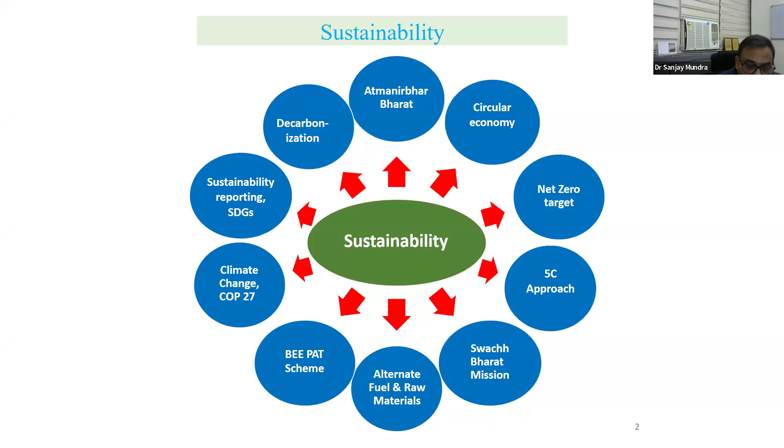Climate change as per COP27, now COP28, 29 - every year we do this climate change conference of party meetings through the PM or nation's representatives. Sustainability reporting, the SDG goals, decarbonization, and ultimately Atmanirbhar Bharat - we will discuss all these aspects.

First we have to understand what are the steps to sustainability. The actual meaning is: whatever locally available materials, available fuels, available resources - how can we convert these into sustainable use. If we talk about high strength or high performance concrete, the term is simple, but you have to understand how to procure and produce it. That is a challenge - how can we make concrete more durable, because our IS 456 is now going to be revised from prescriptive basis to performance basis.

Replacing Portland cement with supplementary cementing materials - fly ash, GGBS, silica fume, metakaolin, natural pozzolans, rice husk - we have already discussed a lot, and your institute too. These are all replaceable binders, and we are coming not only with single binders but quaternary binders, ternary binders as well. Using fillers like finely divided limestone and finely divided silica - researchers are doing tremendous work here, making more sustainable cement and concrete using these fillers.

Using waste materials as fuel, like refuse-derived fuels and plastic waste. Using recycled concrete - be it aggregate, concrete part, or fines - and industrial waste as aggregate. Using carbon capture utilization and storage is very important now, as every institute in the world is thinking about CCU and CCS technologies, which I will discuss in the worldwide roadmap. Using less water is required to make performant concrete for durability. By incorporating new generation chemical admixtures - PCE based admixtures from generation 1 to generation 5 - and improving structural design and building codes, all these are areas of focus for sustainability.

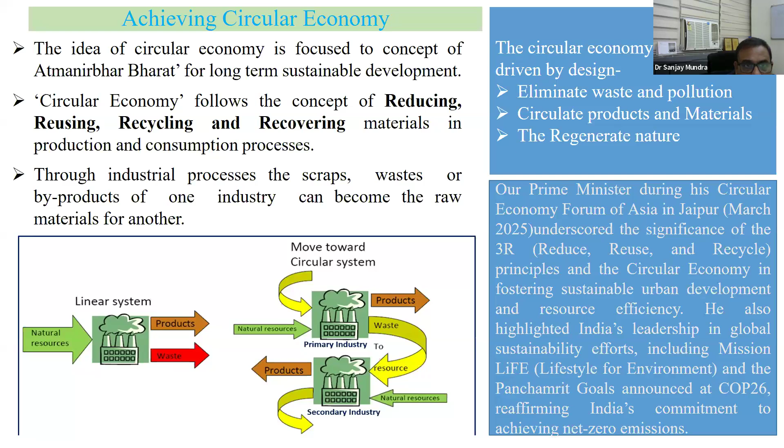Most developed countries have targeted around 2050 for net zero, but India is gradually targeting 2070, so that we can achieve the goal of net zero and minimize the global warming level, which is 1.5 degrees Celsius.

The status of CO2 emission from Indian cement industry: the overall installed capacity of cement in India is currently 690 million tons, precisely 693, and cement production for year 23-24 was 427 million tons. So there is a huge gap between the production and the consumption, and we have to bridge that gap.

Globally, cement sector's CO2 emission is around 7% of total anthropogenic emissions, while the CO2 emission factor was 1.12 in 1996. Now, with the use of novel binders and supplementary pozzolanic material, we have to reduce it to 0.617, through indirect emissions also.

Reduction of clinker factor, because all the GHG emission or CO2 emission comes from the clinker. So how can we reduce the clinker factor? That is the challenge. We are using novel binders apart from pozzolanic materials.

We have brought so many new novel cements in the form of LC3, Portland dolomitic cement, Portland limestone cement, and other low heat cements we are producing.

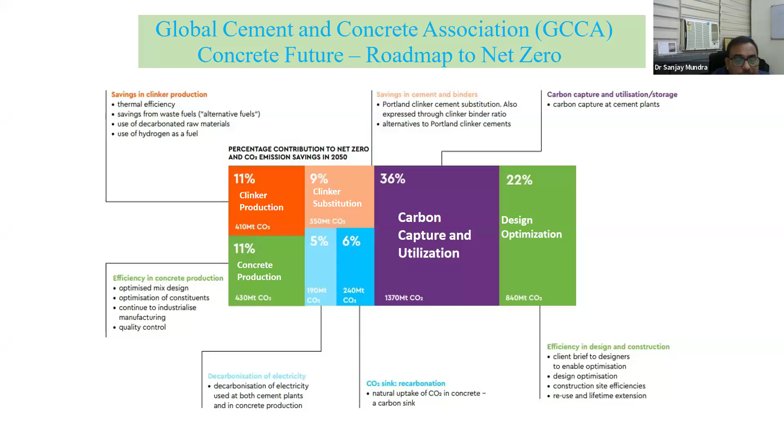And efficiency design construction, by briefing the designers to enable design optimization, construction site efficiency, reuse, and lifetime extension. So this is another roadmap of CEMBUREAU, which has the 5C approaches.

Then another Portland Cement Association roadmap to carbon neutrality from clinker, cement, concrete, construction, and carbonation. So the ultimate aim is we have to think about what is the near solution and what is the long-term solution.

If we talk about the near-term solution, we have to replace raw materials like aggregates, admixtures, and different types of fuels with recycled materials, produce low carbon cement blends, and optimal design for the lowest life cycle emission. Go to midterm.

Midterm means somewhere between around 2035 to 2045. Increase the use of alternative fuels and use of renewable energy, like I told you, wind and solar.

Long term, we can make carbon capture, introduce new cement blends. Carbon capture is basically a good technique. As I told you, it has a 36% share to reduce CO2 emission.

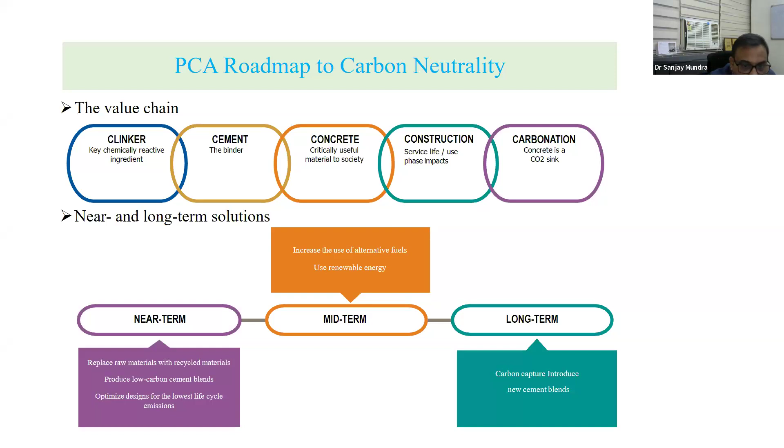But actually in India, if you see, it is not widely implemented. They are trying with making pilot plants and some industrial scale plants to directly capture CO2 from the cement plants, and then they can utilize it in construction.

And now we talk about every lever. The first is the substitution of clinker. So this is the overall scenario.

Now substitution of clinker - if we see the research, normally for reducing the carbon footprint, fly ash based cements and all the industries are using GGBS slag cement.

This is the new code developed for LC3. It is a very good cement - limestone calcined clay cement. Then limestone based cement, Portland limestone cement, calcined clay and natural pozzolans, and multi-blend cements.

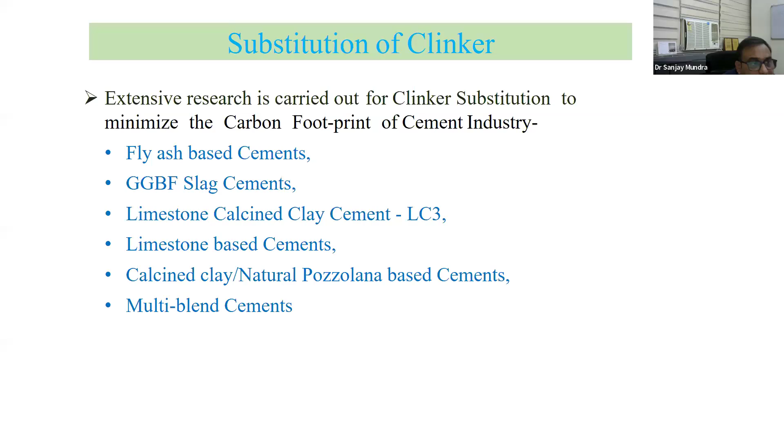As I told you, the quaternary blend is also coming with the use of clinker. So ultimately, the aim is to reduce the clinker percentage to less than 45% or 40%, so that we can make a sustainable or novel concrete by reducing the carbon footprint.

Then Portland composite cement is another thing we have done research on, with the use of fly ash and GGBS. This is another ternary blend.

Recently formulated IS standard on composite cement allows simultaneous addition of fly ash and GGBS to manufacture composite cement with clinker factor as low as 45%. So we have already reached the level of 45%.

Our target is 35% or 30%. So we can reduce the CO2 emission in the next 10 to 15 years.

Due to limited availability of GBFS, the manufacture of composite cement is limited to fewer cement plants. However, this is another challenge because the pig iron industry is only scattered in the south and east parts.

So now, if the pig iron industries try to produce composite cement, the challenge is logistics. But every plant is thinking that we will use this cement more, and how can we economize this particular cement - that is what they are targeting.

While fly ash and limestone is available in the country, the composite cement comprising of fly ash and limestone intends to use limestone other than cement grade to increase the sustainability in limestone mines life.

Now Portland limestone cement is another cement which we have given the data to BIS. Studies were conducted to investigate the feasibility of using different grades of limestone for development of PLC and first standardization by BIS. The study concluded that limestone addition of appropriate quality and fineness up to 15% could be possible. Based on various replacement levels of 5%, 10%, 15%, 20%, 25%, we found that this optimization can be done up to 15%, and more research is being done to make a higher limit of 20 or 25%.

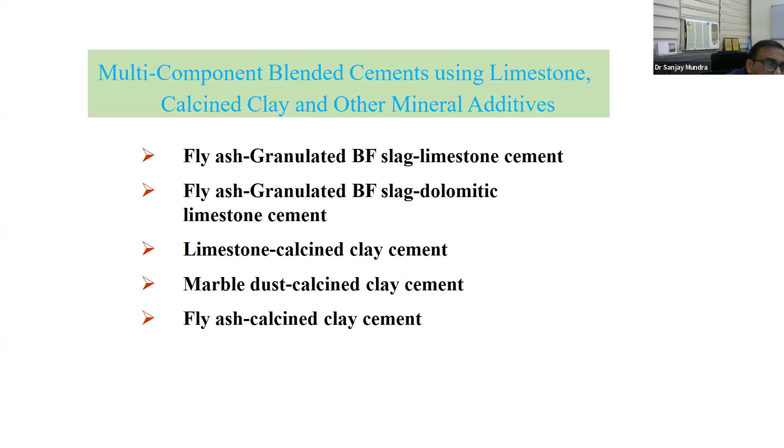Then there is multi-component blend cement using limestone, calcined clay, and other mineral additives: fly ash and GGBS limestone cement, fly ash and GGBS dolomitic limestone cement, limestone calcined clay LC3 cement, marble dust and calcined clay cement, and fly ash and calcined clay. So much research is going on with calcined clay and limestone as mineral additives, so that we can make sustainable cement binders for future generations.

So how can you make multiple blends? You can reduce more CO2 emission from the different cements.

There is another lever: waste utilization in cement industry, inventory and characterization of various industrial waste byproducts, by enhancing thermal substitution rate from the present 7%. As I told you, the thermal substitution rate is only 7%, so we have a target in 5 to 10 years to reach 25%.

By utilization of alternative fuels, I will show you the list of alternative fuels which industry is now ready to use, and some industries are already using.

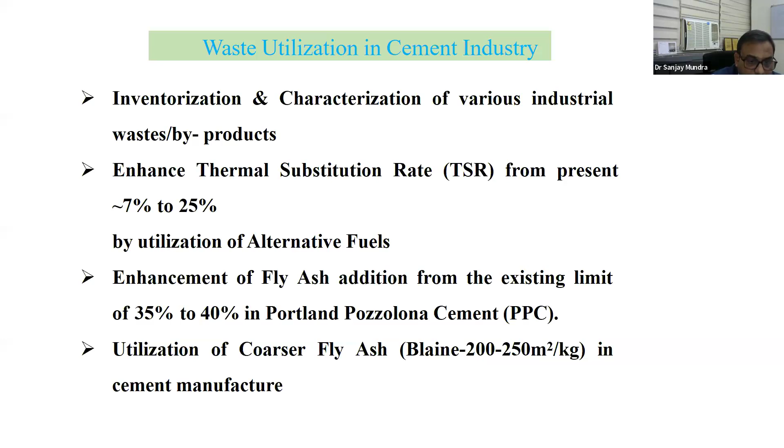Enhancement of fly ash addition from the existing limit of 35% to 40% in Portland pozzolanic cement, and utilization of coarser fly ash with a Blaine of 200 to 250 meters square per kg. Earlier we were using fly ash with 300 meters square per kg, but now we are targeting coarser fly ash, which is also good for manufacturing purposes. So we are having the target for a Blaine of 200 to 250 meters square per kg.

High MgO clinker, that is another good low carbon cement - studies are completed, under formulation of codes by BIS. Development of geopolymer concrete for applications in pavements and precast concrete production - these are already completed, code has been developed, and another code will be formulated by BIS for geopolymer.

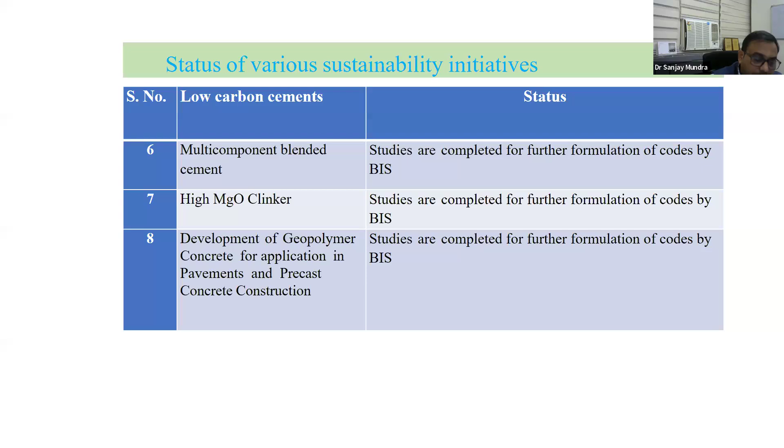These are another list of alternative fuels. Biofuels are also there, like cow dung, agriculture waste, rice husk, soya husk, sawdust, mustard husk, cashew nut - all these can be used. So everybody has the ample opportunity to do research on these types of alternative fuels and use them in the cement industry.

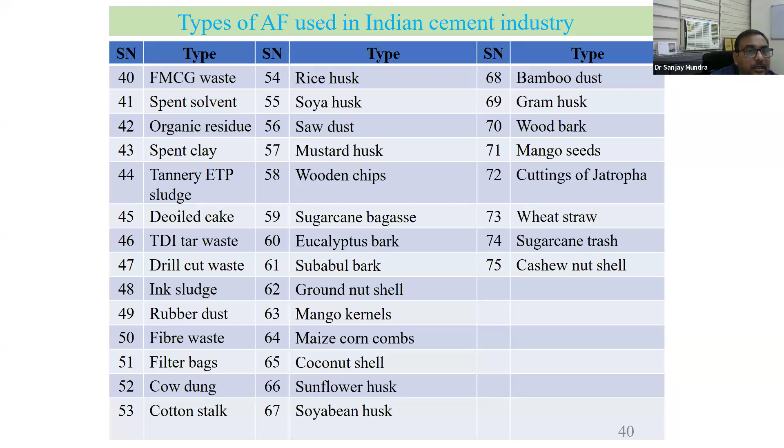Jarosite is another alternative raw material, 1 million ton per annum, obtained from zinc extraction by hydrometallurgical process. It can be used from 1 to 1.75% as raw material, with added advantage as a mineralizer.

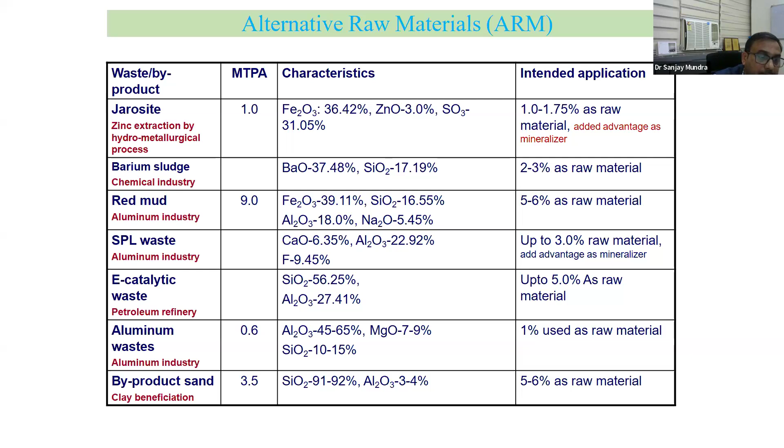Barium sludge is also used for 2 to 3% as raw material. Red mud can be used 5 to 6% as raw material. Aluminum industry SPL waste can be used up to 3% as raw material. Electronic catalytic waste from petroleum refinery can be used up to 5%. Aluminum waste up to 1%. And byproduct sand with 3.5 million ton per stock can be used as 5 to 6% raw material.

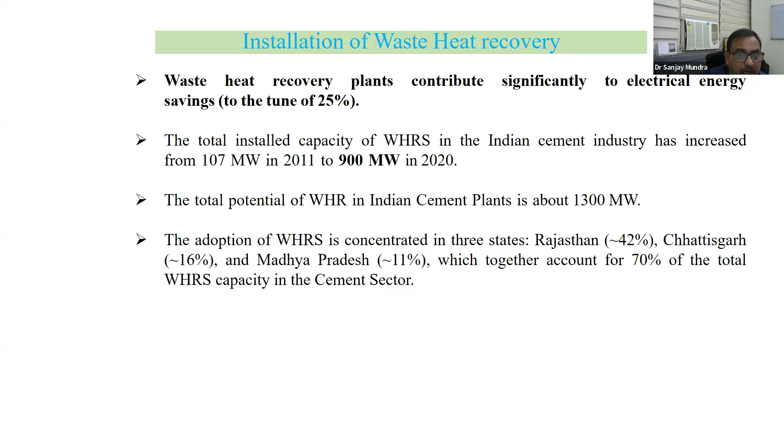Waste heat recovery is concentrated in Rajasthan 42%, Chhattisgarh 16%, and MP 11%, because most of the cement plants are located in these areas. Together they account for 70% of total WHR capacity in the cement sector.

Now, lever 5: new technologies, renewable energy, and carbon capture. Stage 1, when we talk about it, is very important. This is the fifth lever, capturing CO2 in the cement industry. There are various methods of carbon capture: post combustion, oxy-fuel combustion, and pre-combustion. In post combustion, the process extracts CO2 from the flue gases after combustion of fossil fuel.

You know the fossil fuels which we are using - coal, petcoke, all these are fossil fuels, and natural gas, all these are fossil fuels.

Then the method for post-combustion is calcium looping. How can we extract the calcium part? Then chilled ammonia process, chemical absorption with monoethanolamine, and solvent based absorption - these are the techniques. Another one is oxy-fuel combustion, supply of complete oxygen in replacement of air.

This project has been a worldwide famous project called LEILAC, using this oxy-fuel combustion. Pre-combustion involves coal gasification producing gray hydrogen. So now we are converting all these different types of fuels into gray, then blue, and then green hydrogens. All these are coming.

Then carbon capture technologies - these are the available technologies worldwide. Post combustion carbon capture solvent techniques by RTI International. They have gone up to the level of TRL6, and the cost of CO2 capture is around 3,200 per metric ton of CO2, and they are already demonstrated at scale.

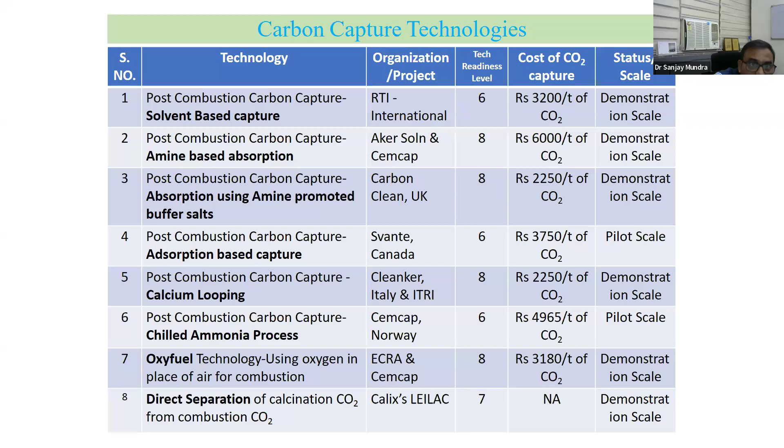Oxy-fuel technology uses oxygen in place of air. In replacing air by oxygen, ECRA and Cemcap are at level 8 at demonstration scale, and direct separation of calcination CO2 from combustion CO2 - that is Calix's LEILAC, at TRL level 7, at demonstration scale. Now, what is the role of CO2 mineralization in decarbonization of cement production?

CO2 mineralization, or mineral carbonation process, is storage of CO2 in the form of carbonates of calcium and magnesium. As you know, all the different alternative aggregates have leaking of calcium and magnesium ions. So how can we trap this CO2 from different plants? By increasing the CO2, we can convert it into calcite and magnesite. Calcium magnesium carbonates are poorly soluble in water, thermodynamically stable, and thus provide a permanent storage solution of CO2.

The main advantage of mineralization technology is that flue gases from the cement plant can be directly used for CO2 sequestration. The method of CO2 mineralization mimics the naturally occurring weathering process. This is a spontaneous reaction that needs to be accelerated with a small amount of energy.

This is the carbonation of industrial solid residue. You can see the list of so many waste materials available - you can readily get the mineral carbonation technique with blast furnace slag, ladle slag, electric arc furnace slag, copper slag, carbide sludge, recycled concrete aggregates, paper mill waste, biomass ash, incineration bottom ash, fly ash from thermal power plant, and cement kiln dust.

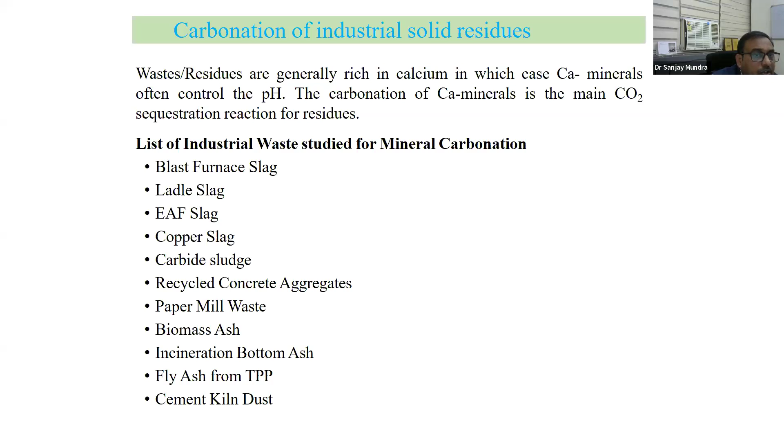So there is a lot of space for researchers to do research using different combinations or single aggregates. They can replace all the natural aggregate with this type of aggregate using the mineralization technique.

So the main aim is to reduce the carbon footprint, through sustainable forestry practices, technology advancements, and positive social impact, aligned with global sustainability goals - benefiting water conservation, local sourcing of materials, well-being of current and future generations, circular economy, helping resource conservation, energy efficiency, and waste reduction.

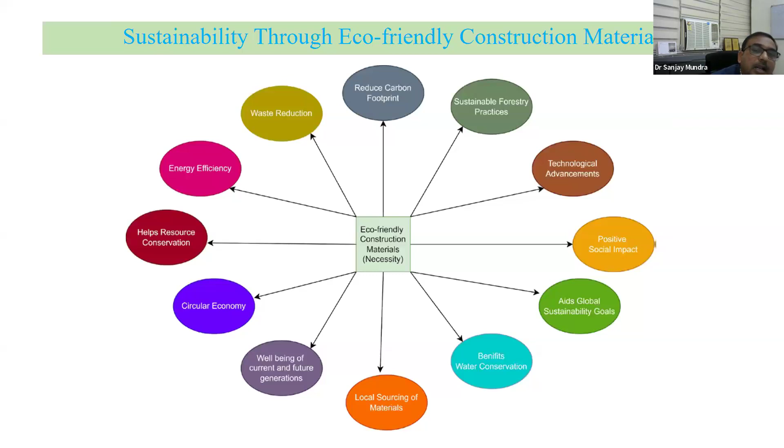So all these construction materials, I will just give you the brief on how we can use them by replacing natural aggregates. They are more sustainable and can make a greener earth and carbon sink technology.

Recycled concrete is a pivotal eco-friendly construction material derived from crushed concrete debris. It mitigates the environmental impact associated with traditional concrete production by repurposing existing materials. Recycled aggregates or crushed fines from concrete can be easily utilized both as fine and coarse aggregate.

You can make better concrete and reduce CO2. The recycling process maintains fundamental properties such as compressive strength and durability, offering a sustainable alternative without compromising structural integrity.

Recycled concrete finds extensive use in various construction applications, serving as a best material for road construction, embankments, and foundations. Its versatility extends to structural components like beams and columns, showcasing its adaptability in increasing resilient and environmentally responsible building.

Overall, if you see the market, in 2024 it was 2.67 USD billion, expected to grow from 2.84 USD billion in 2025 to 5.06 billion by 2034. Annually, the CAGR is around 6.6% from 25 to 2034. So the more construction demolition waste available, the more chances of growth and research on this particular type of concrete aggregate, be it fine or coarse.

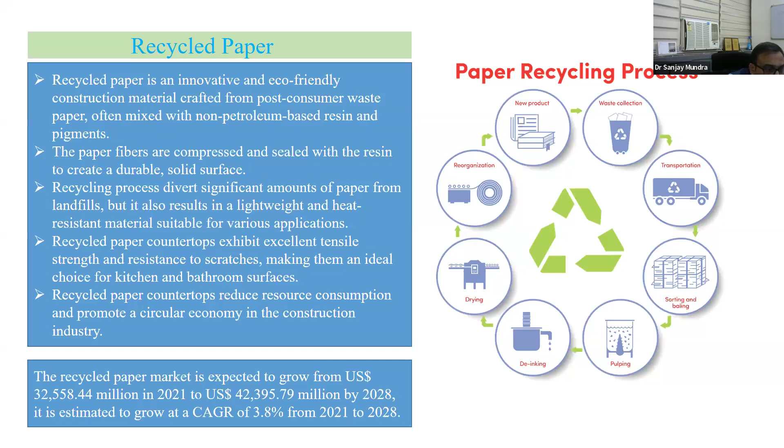Overall, if you see the market, it is around 32,558 million in 2021. Now in 2028 it will be 42,395 USD million, and it is estimated to grow at a CAGR of 3.8% in 7 years.

Sourced from salvage timber, reclaimed wood promotes sustainability by repurposing materials that would otherwise go to waste. It has inherent strength, durability, and character, making it a versatile choice for a myriad of construction projects. Whatever the reclaimed timber, it has almost equal strength and durability in terms of structural application.

Reclaimed wood excels in creating sturdy beams, columns, and framing elements. In India, in the northeast, we have so much availability of timber, and in some parts of the south also, so that can be utilized as a construction material for beams and other structural members.

Reclaimed wood supports builders and designers to contribute to the circular economy, diminishing waste and affirming a commitment to responsible construction practices while prioritizing ecological preservation.

Global reclaimed lumber, also named as wood, the market reached USD 62.2 billion in 2024, and it's set to grow at 3.89% CAGR from 25 to 33, reaching 88 billion USD by 2033. So you can see the scope of this reclaimed wood.

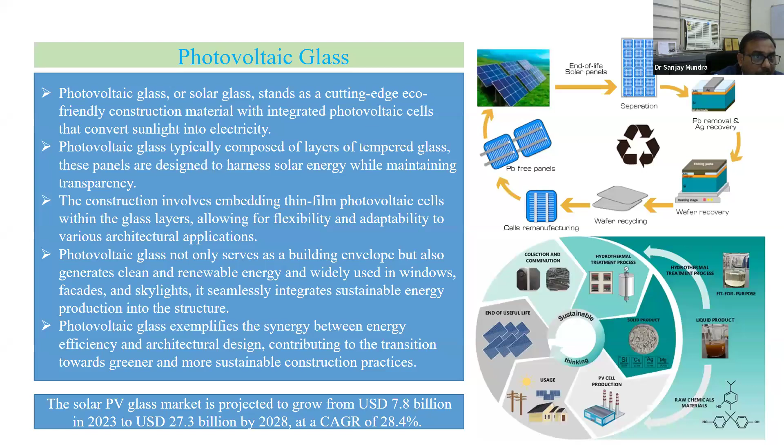If you see the US market, it was 7.8 billion USD of solar PV glass market in 23. Now by 28, in 5 years it will be around more than 4 times, 27.3 billion, with a CAGR of 28.4%. So there is enough scope of use of these photovoltaic glasses.

Then cork is nothing but an eco-friendly construction material having exceptional properties and diverse applications. It is taken from the bark of oak trees. The process is environmentally benign, allowing trees to regenerate and continue absorbing carbon dioxide, so this oak tree has the capability of reducing carbon through carbon sink technology.

Cork is impermeable to liquids and gases, making it an ideal flooring material particularly for areas prone to moisture. So where the moisture is more, cork can be used as a renewable and versatile resource. Cork embodies sustainability in construction, offering a viable alternative that enhances energy efficient building and also supports biodiversity and conservation.

The global cork material market size is around $5.2 billion in 22, and it is expected to reach around $8.6 billion by 2031 with a CAGR of 5.8%.

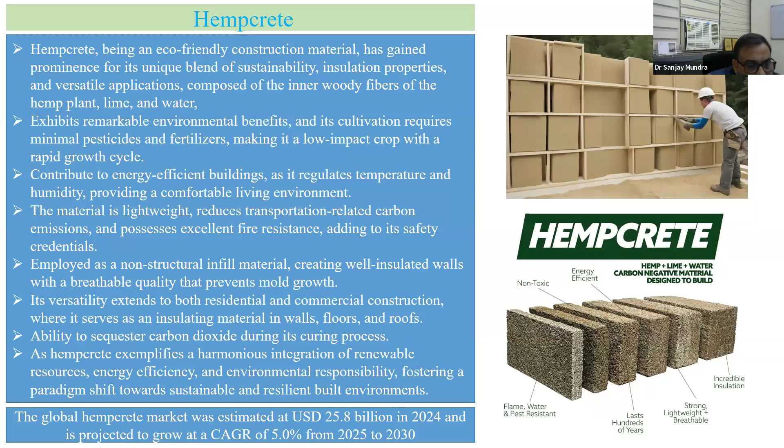So this is recycled plastic. As you all know, single-use plastic is normally banned, and now it is banned by the government. So we can use recycled plastic in different applications.

How can we make a collection of waste, then sorting out, shredding it, washing, and making a proper fabrication? Recycled plastic exhibits high durability, moisture resistance, and immunity to insects, making it suitable for outdoor applications. Recycled plastic lumber, for instance, can replace traditional wood in decking, fencing, and landscaping, offering a low maintenance and long-lasting alternative.

This contributes to wall construction, providing insulation and weather resistance. Real-time applications extend to structural elements such as piling work, which are used in marine construction due to their resistance to water degradation. Recycled plastic in construction projects contributes to circular economy principles by mitigating the environmental impact of plastic waste and creating durable, eco-friendly structures.

So overall, the recycled plastic market is around 5 billion USD in 2024, and it may reach 6.6 billion by 2029.

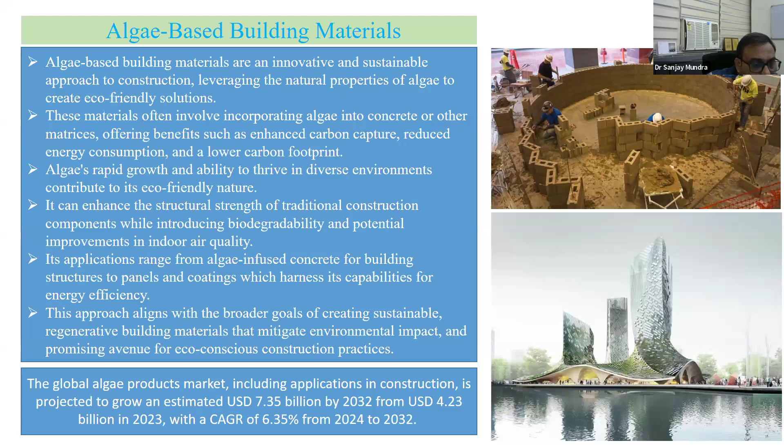This approach aligns with broader goals of creating sustainable, regenerative building materials that mitigate environmental impact, promising an avenue for eco-conscious construction practices. The global algae products market, including construction applications, is projected to grow to an estimated USD 7.35 billion by 2032 from USD 4.23 billion currently, increasing within the next 7-8 years.

Now this is insulated concrete forms, another sustainable construction material. These consist of interlocking lightweight forms made of materials like expanded polystyrene, which serves as the inner material.

They have better thermal performance, reducing energy consumption, and can be used in both residential and commercial applications with a balance of structural strength. Speedy construction is possible due to lightweight materials, reducing waste and creating a more sustainable built environment as an eco-friendly construction material.

The global insulated concrete forms market is valued around 1.2 billion USD in 2023 and may reach around 2.1 billion by 2032.

Another one is salvaged bricks. The bricks can be reused as a sustainable, eco-friendly material taken from deconstructed buildings or demolished construction sites. Reusing them significantly reduces the demand for new clay extraction and energy-intensive brick manufacturing processes. Applications range from residential renovation to commercial development, offering a unique blend of historic authenticity and environmental responsibility.

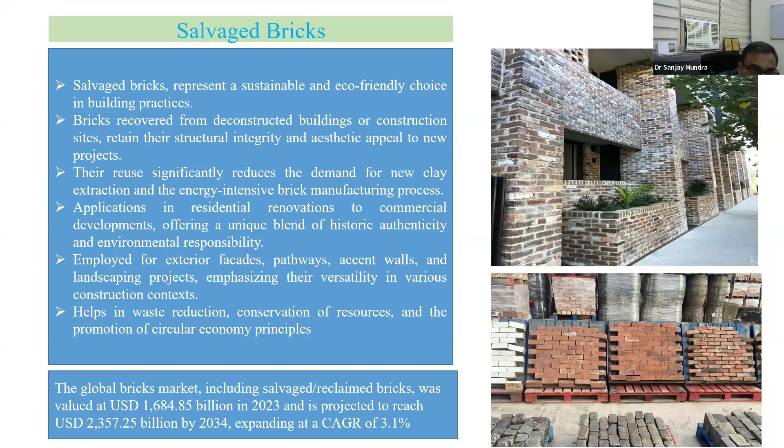This is rice husk particle board. Rice husk is normally available and is a good agricultural waste that can be utilized as a cement binder, having good pozzolanic value. These boards are an eco-friendly construction material replacing traditional wood particle boards. It is a byproduct of rice milling, combined with a binder.

The ultimate aim is to make construction materials for lightweight design, strength and versatility. Rice husk particle board finds application in various construction elements including furniture, cabinetry and interior paneling, promoting sustainable forestry practice and mitigating the environmental impact of rice husk disposal. Rice husk particle boards support circular economy principles, repurposing agricultural byproducts into durable and functional construction materials suitable for diverse building applications.

If we talk about the overall global market, it is around 2.5 billion in 2020, and it may increase to 3.5 billion by this year.

These are the cast earth blocks, another good eco-friendly construction material comprising a mixture of earth materials, stabilizer, and sometimes fiber. These can include natural thermal mass, regulate indoor temperature and breathability, promoting healthy indoor air quality. These blocks are often produced on site, minimizing transportation related environmental impacts.

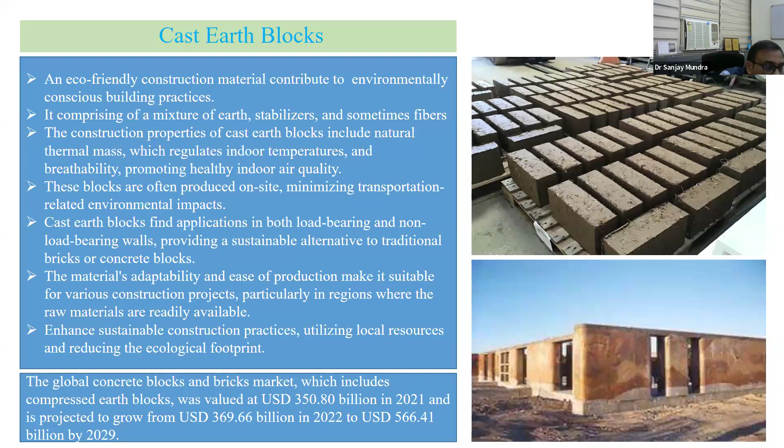Recycled aluminum can be extracted from the aluminum industry, and it also has sustainability as an eco-friendly material. Its corrosion resistance, strength and lightweight nature make it an ideal choice for construction applications. It can be used for roofing, facades, structural components, and window frames, showcasing its versatility in both residential and commercial projects. It supports green building initiatives aligning with environmental standards and certification, and helps the circular economy by promoting resource conservation and minimizing environmental impacts associated with traditional aluminum production.

The global recycled aluminum market is around $49.1 billion in 2022, and it may reach 101.7 billion by 2032.

This is the gypsum board. The gypsum board also has recycled content, and it can be used for roofing purposes. These boards have properties including fire resistance, sound insulation, and ease of installation. Utilizing this gypsum board reduces the demand for virgin gypsum mining, conserves natural resources, and decreases environmental impact.

This gypsum board performs comparably to conventional gypsum board, meeting industry standards and certification. Its applications include interior walls and ceilings, surfaces, partitions, and enclosures. The material is versatile, accommodating various finishes. Recycled content gypsum board supports sustainable construction practices, promoting resource efficiency and contributing to the circular economy.

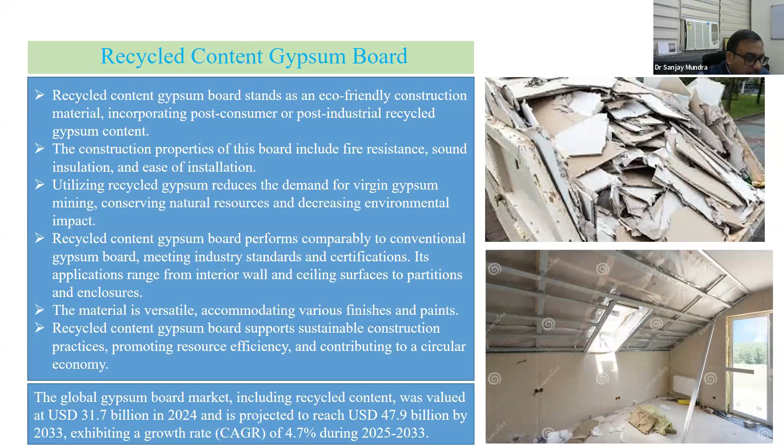The global gypsum market in 2024 was around 31.7 billion, and it may reach 47.9 billion by 2033.

Now let's talk about the sustainable construction journey in this particular decade. From 2020 onwards, technology innovation has been done in material processing. The new concept is 3D printing, emphasizing precision, waste reduction, and novel complex designs that minimize material use. Then there's automated or robotic framework fabrication, which focuses on speed and efficiency, reduces labor cost, and enhances precise manufacturing.

These are all software-aided tools, run from programming, that can easily make fabrications and enable faster construction. Building information modeling, or BIM, is another new concept especially in construction design. It enables good planning, reduced resource use, and improved coordination and accuracy in material application.

So you see how 3D printing can enable proper utilization of materials in a proper manner, optimizing materials through layer by layer construction. This is also known as additive manufacturing. The technique has precision, meaning significant reduction in waste compared to traditional construction methods.

So you can utilize the local materials available also. You can utilize it in any form of construction, be it a commercial building or residential structure.

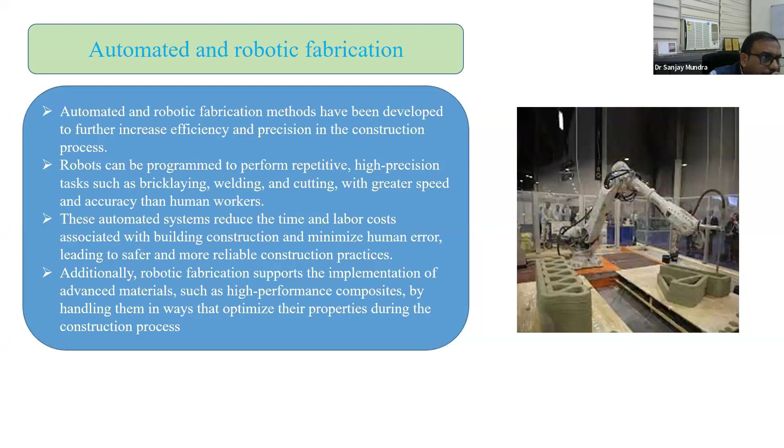PEB permits the use of optimized column-free space to suit racking arrangements and internal logistics requirements. These are totally shop-fabricated, requiring bolting of components to get them connected on site to previously completed foundation and substructure. So you can connect it from foundation to the top level, with faster construction, more reliable construction, and more efficiency.

PEB features a structural steel framework of primary and secondary members, having rigid frames, beams, purlins, girts, trusses, and columns, on which cladding and roofing components are attached. Such buildings are intended for commercial, industrial, and institutional occupancies, as I told you, making economic and speedy construction.

This is BIM - building information modeling. The main purpose of BIM is to get all stakeholders, be it architect, builders, or consultants, on the same wavelength. They can get an idea of whatever is happening in the building, each element, how it is constructed, what processes the builder is doing - so they are on the same path and allow virtual design management of the building throughout its life cycle.

BIM models help to plan and simulate the construction process before physical work begins, ensuring material usage is optimized and potential issues are identified early. So you can make proper planning earlier, before construction. This integration not only streamlines the construction process but also enables a more sustainable approach by minimizing waste and improving overall building performance.

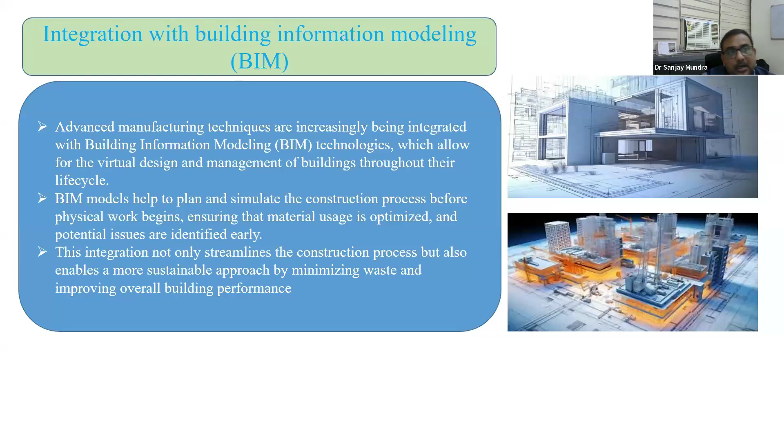So another new technology is coming - the digital twin. It is an upgradation of BIM. The physical twin, as you can see in the photographs, is the BIM - it can be used for design and construction, but digital twin can make an assessment of the performance of the building in terms of operations.

You can see how we collect data from the actual asset or actual building, and we can make a similar replica as a digital twin, addressing whatever lapses have occurred in the physical twin or actual existing structure. We can minimize the lapses in the digital twin.

Digital twin meaning the exact digital replica of a construction project or asset - a building or group of buildings, a bridge, a highway, a city block, or even an entire city. So you can make a smart city construction through the digital twin, as a replica of all the different blocks. Digital twin construction can be called data twins, virtual models, or even next generation as-built drawings.

So you need not to be having the additional drawings. You can make a proper digital twin to the earlier existing physical twin or existing building.

Digital twins are created by gathering and combining real world information about the building or structure using technology: three-dimensional laser scanners, drones, sensors, cameras, and IoT based devices. Digital twins supported by IoT or artificial intelligence are able to learn from multiple sources and automatically update to reflect adjustments made to its real world counterparts.

Digital twins deliver information on the object's properties and state information. Basically, whatever three-dimensional view you are doing in the physical twin, you can get an idea of the object's state information, physical orientation, shape, position, gesture, motion, as well as inside other status, interaction, and updates such as stress loads due to traffic or wind or leaking pipes.

In metropolitan cities like Delhi, Kolkata, Mumbai, Chennai, and so on, mass rapid transit system is basically synonymous with metro system, not other skyways, LRT, or other systems. Because India is the most populous country in the world, our urban nodes are also very populous. As on date, we are catering around 8 million passenger journeys every day in Delhi. So let me start with a quick glimpse of this entire organization.

We are basically a registered company, or PSU kind of organization, registered way back in 1995 on 3rd May under the Companies Act. It has equal participation from Government of India as well as Government of Delhi. It's a special purpose vehicle. As on date, we have created a huge network of around 400 kilometers, with 289 stations, including the Noida line and Rapid Metro Gurgaon.

We are running our trains with a very niche or latest technology across the globe, called unattended train operation. It's the fourth level, or fourth grade, of automation—the highest grade, which is used in airlines. That is unattended train operation, or unmanned train operation. We are using that technology especially on the pink and magenta lines. Our trains use communication-based train control system technology, meaning trains talk to each other as well as with the operation control center through the system. That is how this UTO feature is ensured by using CBTC technology.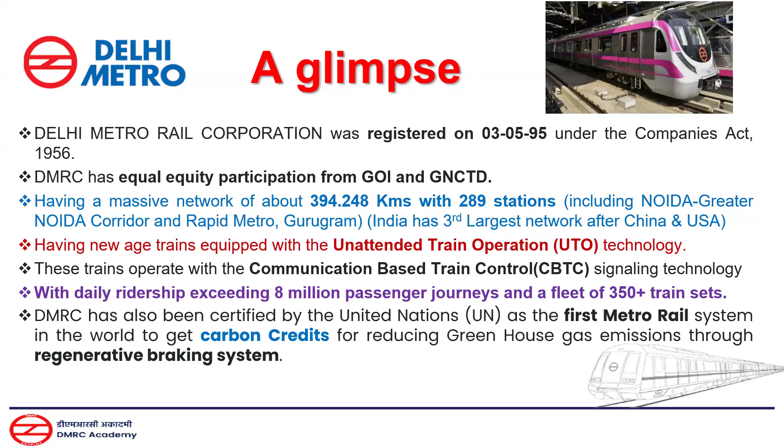DMRC is known for this last point called carbon credits. It is the first metro rail system in the world to get carbon credits from the UN, because of the reduction in greenhouse gas emissions through the regenerative braking system. This metro system uses this regenerative braking system, which is why it is known to all. And obviously the construction practices, and the fast construction practices, made this organization stand out among its peers and every other sector.

We are also generating solar power from our own rooftop installed solar system, more than 50 megawatts of power generated from our rooftops. That was all about this organization and some technologies which we are using.

So let's look at how this precast construction technology, which we have adopted in our construction domain, is helping to achieve sustainability, which is the topic of this forum and session. We all know construction conventionally means going to the site with all resources—money, manpower, and material—and constructing or building structures as per the design and drawings.

That was a conventional method, but in recent years, around 15 years, this entire segment of the construction industry has evolved because of new techniques called precast techniques. In big detail, there are subdomains: pre-tensioning, post-tensioning, precast, pre-stressed technology, and precast RCC technologies, which we use in underground sectors and structures. There are lots of structures we use as precast, like girders in elevated corridors, tunnel rings and segments in underground, and even precast slabs are used in MRTS sectors.

So that is being used in stations. Why has precast taken so much height above all other methods? Because in this methodology, the structure is produced in a controlled environment, like a lab kind of atmosphere, wherein the quality of the structure and quality of the processes can be ensured in a much better way compared to in-situ construction or the conventionally followed methods. That is why this has taken much more importance.

So we talk about the construction of tunnels using precast segments. There are three methods. One is cut and cover method, a very conventional method where you go outside, cut the ground, create the tunnel box, and then cover it up. It's not a latest or precast method - it's a basically conventional method.

The next method is EPB or TBM, mechanized method. This method uses precast RCC tunnel segments or rings. The last one is NATM method, a very dynamic method - you can say a dynamic approach to construct a tunnel. It's the New Austrian Tunneling Method, using more manual approach with pneumatic tools and machinery to break the ground. Normally using these three methods every underground corridor is constructed, but only in the mechanized TBM method are precast RCC rings used.

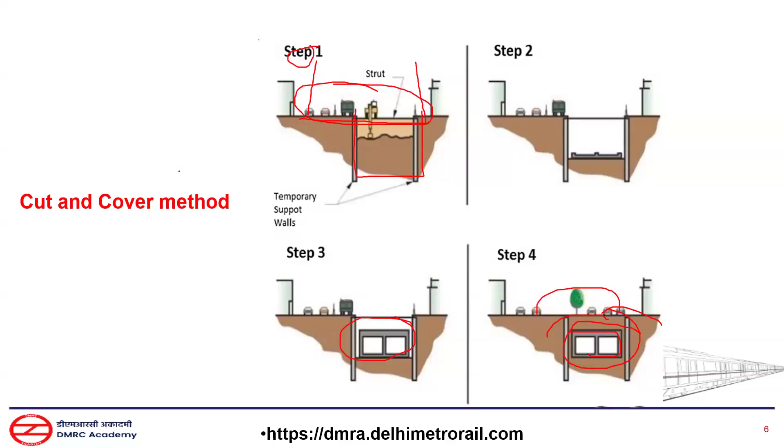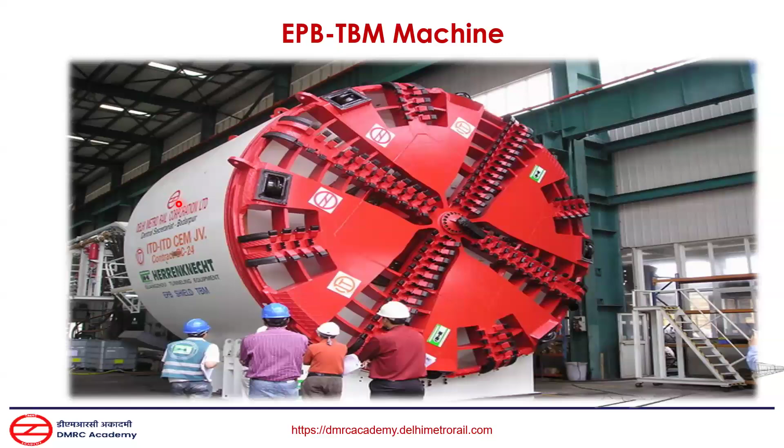This is the jumbo machine being used across all the metro organizations. These are shield TBMs. The front red portion is called the cutter head, which actually cuts the soil or rock in front, and the back portion is a shield portion wherein all the equipment and components of the machine are installed.

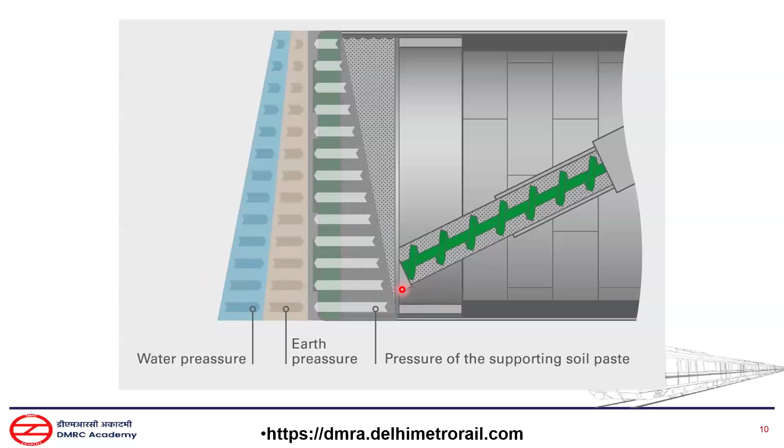So this is how this EPB shield TBM is working. That is why it is called earth pressure balancing machine. The machine which is cutting the excavation face has to balance the earth pressure simultaneously with water pressure also. Adding to these two pressures, the machine has to exert slightly more pressure so that it can advance in the front direction. Otherwise, the machine will not be able to move.

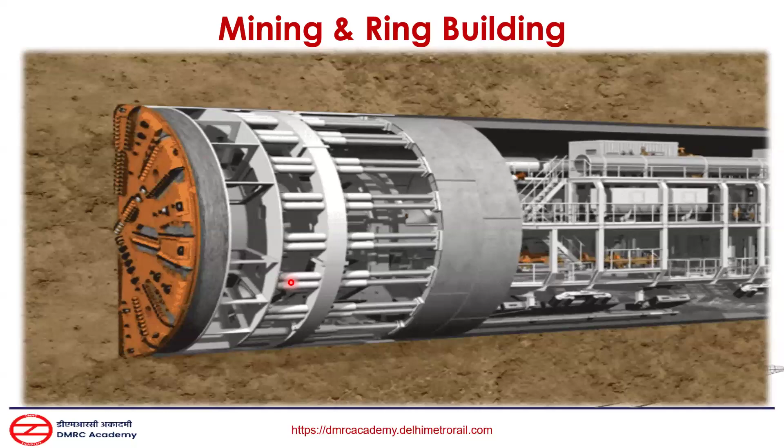This is a small animation. You can just understand how this is actually working. The cutter rotates and the muck is excavated backside, and from the rear side, tunnel segments are being erected.

So these segments are actually precast, and it is saving a lot, in terms of cost and quality also, because the quality control is much more better and effective when we construct these segments in the casting yard. Rather, if you see the conventional method where lining of the tunnel is constructed on site itself, which is very tough, and quality control is very challenging. So the precast technique has basically proven useful for time saving also.

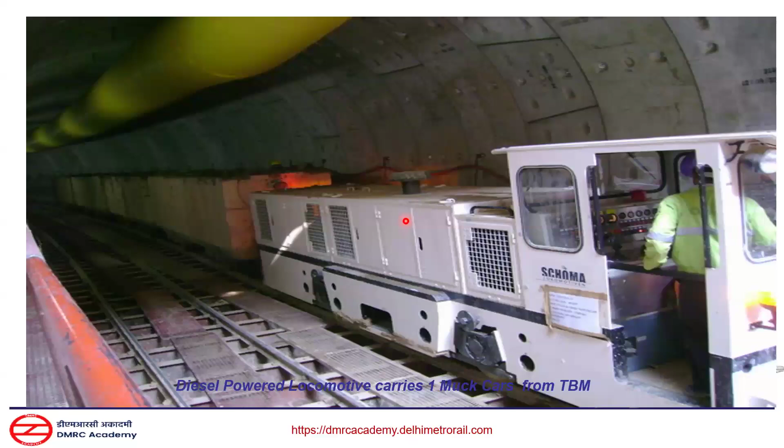So this is some photo. These are some photographs showing the retrieval of the muck from that TBM. The soil which is being excavated is retrieved from the backside. These are basically the muck cars which are used to retrieve the entire soil being excavated by the machine. These are another photos of those locomotives.

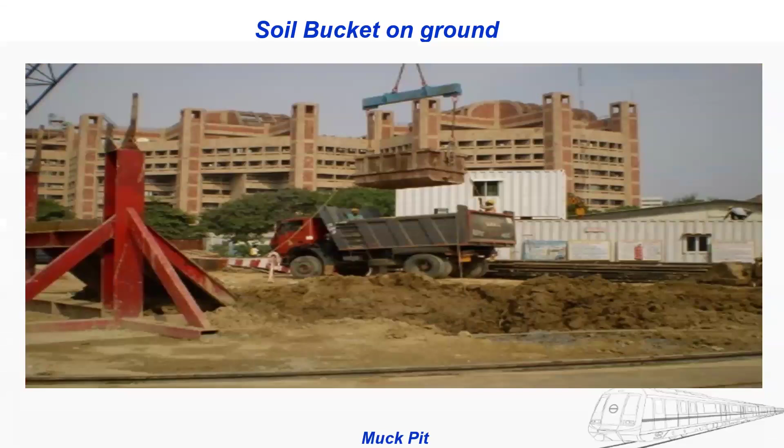The muck which is retrieved from the ground from the excavation is lifted back to the ground surface area, and from there it is transported to the dumping yard. Normally these soils are treated because they are mixed with some slurry and foam sometimes. So this cannot be directly used for horticulture purpose or other purposes. It has to be treated, and then it can be used in backfill. Mostly during our previous phase construction, we have used this soil to backfill the train depot area. We have constructed around 13 depots in Delhi where trains are stabled and maintained in night hours, so that we can operate the train smoothly in daytime. That area is basically a horizontal area on the ground where permanently land is required. So we have used this muck there. We have not dumped this muck like anything, we have reused this excavated soil.

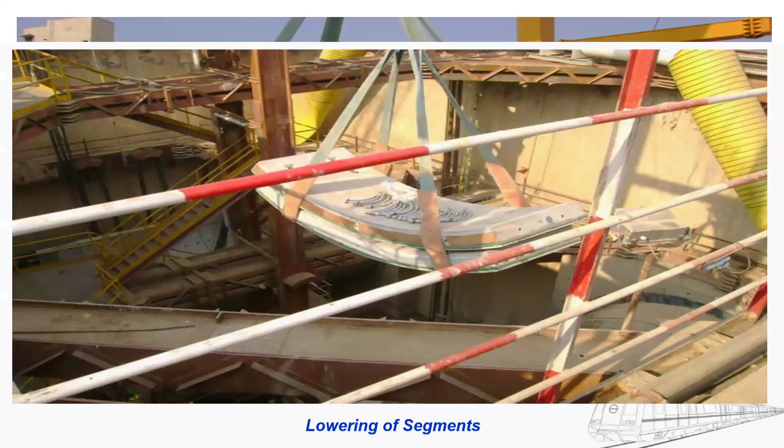So these are the tunnel segments being lowered, a precast tunnel segment being lowered to the excavation shaft, and it is being fed to the machine. Ultimately, this machine will lift this segment, and each segment has a weight of around 3.5 to 4 tons. You can see these persons are involved in fixing this segment with the segment erector.

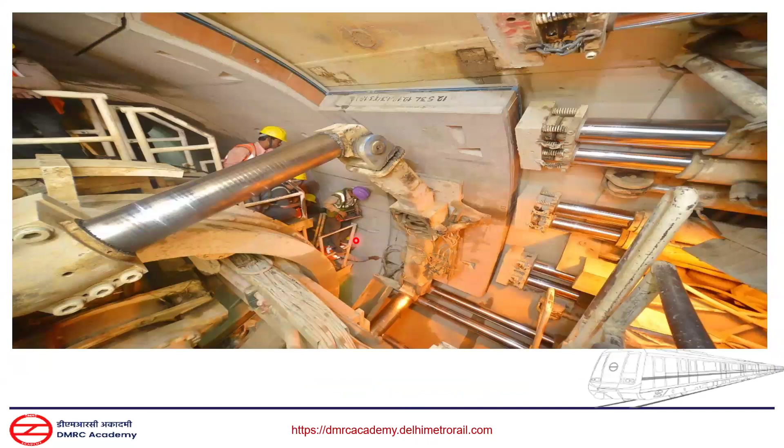This person is using this remote to maneuver the erector so that the tunnel precast segment can be placed within the shield to its actual or accurate profile. These are some other photographs where you can see the precast segment being fixed.

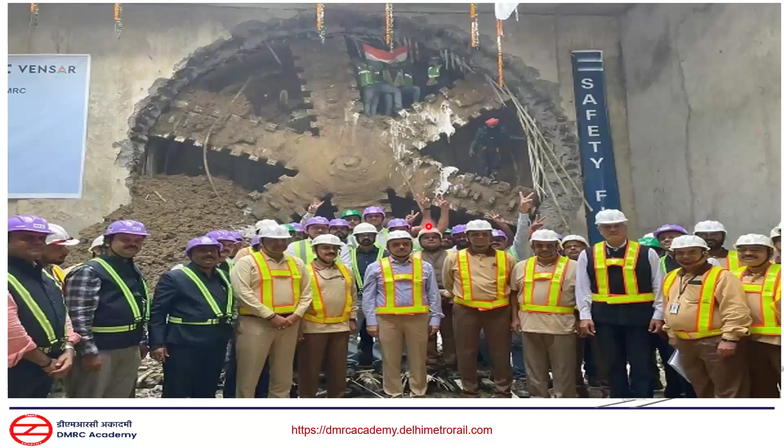Precast tunnel segments have proven to be a quick, time-saving method for fast construction of tunnels. Otherwise it would have been a nightmare, because when we construct underground tunnels in densely populated urban areas, there is a challenge of subsidence and ground settlement. Imagine constructing a tunnel below buildings, roads, or bridges - every centimeter of settlement becomes a nightmare. Manual methods like NATM or cut and cover are very challenging and prone to huge settlements. This mechanized method helps avoid those challenges. By way of precast techniques, construction has become fast, efficient, reliable, safe, and economical.

Post-construction, the tunnel profile is surveyed so that all the geometries, diameter, and center of the tunnel remain at its designed place and design axis.

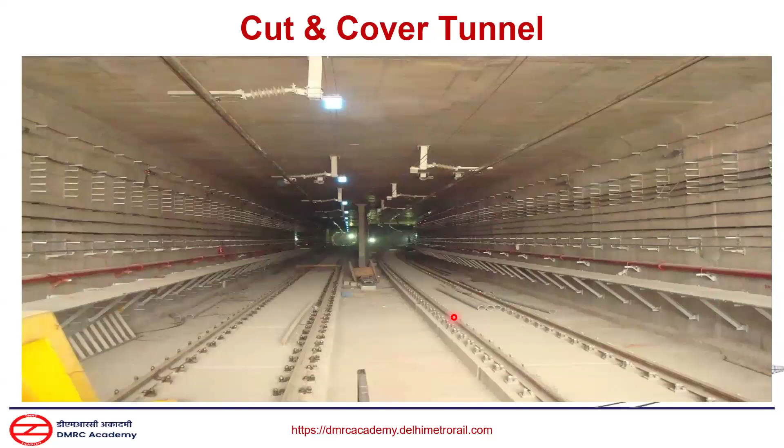These are some other tunnel profiles, basically cut and cover tunnels. At some locations, we have to construct the tunnel through the cut and cover method only, because we need to place structures like this scissor crossover you can see in the photograph. Here we cannot construct the tunnel using a tunnel boring machine, otherwise we would have two separate tunnels that cannot be connected for laying the integrated or scissor tracks. So deliberately, we construct the tunnel in this area by the cut and cover method only - these are very few locations in the entire network.

So job done, trains can run smoothly. That was about the underground corridor and the usage of precast tunnel segments in tunnel corridors. As far as the station area is concerned, metros are generally not using precast segments or structures there, except a few locations like an overhead track exhaust way where we use precast conduits. Otherwise there is no precast structure in the station area - only tunnels use precast segments. I hope I made some sense up till here.

Is there any query till here? Anyone, please confirm.

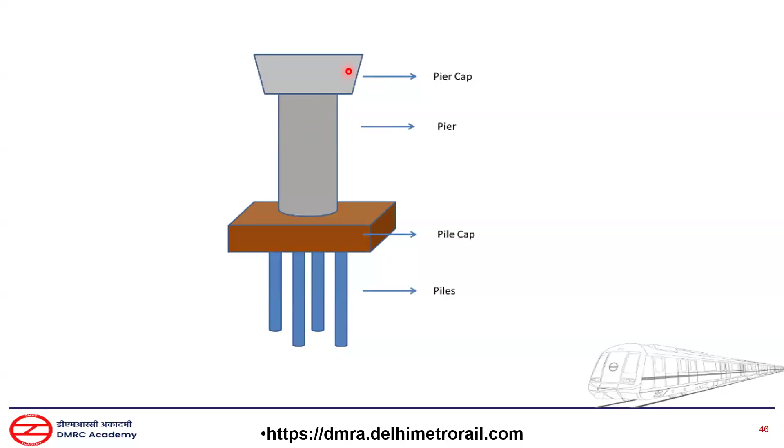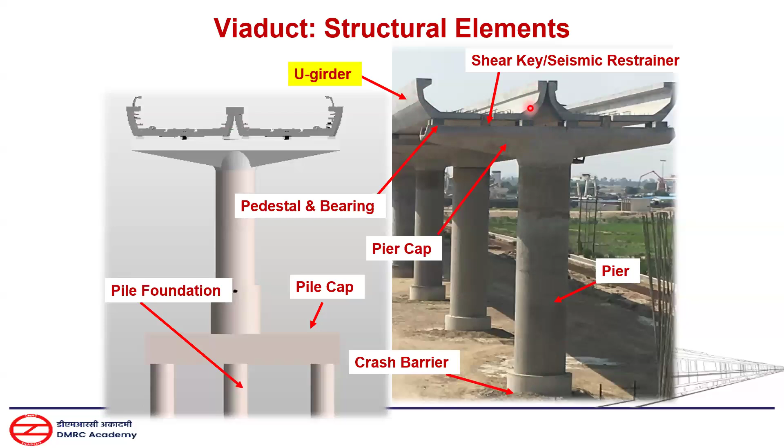These are some basic terminologies and nomenclature of the structures. This is the crash barrier, this is a pier, this is a pier cap, and on the pier cap there are 4 pedestals on which 4 elastomeric bearings are used. On those elastomeric bearings, these twin U girders are simply placed. They are not rigidly connected with the bearings, for seismic consideration.

These pier caps are basically precasted already in the casting yards. These are some photographs. We all know the advantage of going for this kind of precast pier caps and U girders, because in case of in-situ construction, since metro construction is a linear project like highways and railways, if we are installing an elevated corridor in urban areas, every time we have to shift the material, resources and everything to its location, and along the linear alignment it's very challenging to maintain quality at every location.

So it's better to cast all the structures in some fixed location, like a casting yard and lab, and transport the sections and structures to the location where they are to be fixed. That is why precast technique is basically used over cast-in-situ. It is time saving, cost saving as well. It's very simple because every time the same mold can be used, and there is good check on the mold geometry as well, so good aesthetics and finish of the structure is maintained apart from quality.

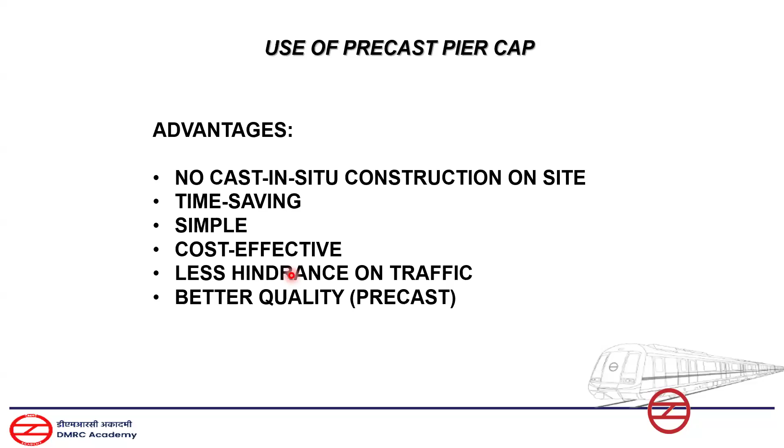If we compare with the previous box girder structures installed in previous lines, this was the arrangement. These are the pier caps. On that, two pedestals used to be there. When the precast box girder was erected, we also had to fix this parapet. These parapets act as sound barriers because we are running our metro system in urban areas, and we have to take care of noise and vibrations also. Then on the deck slab of the box girder, we have to install track also to run the trains on the rails, so it was quite bulky.

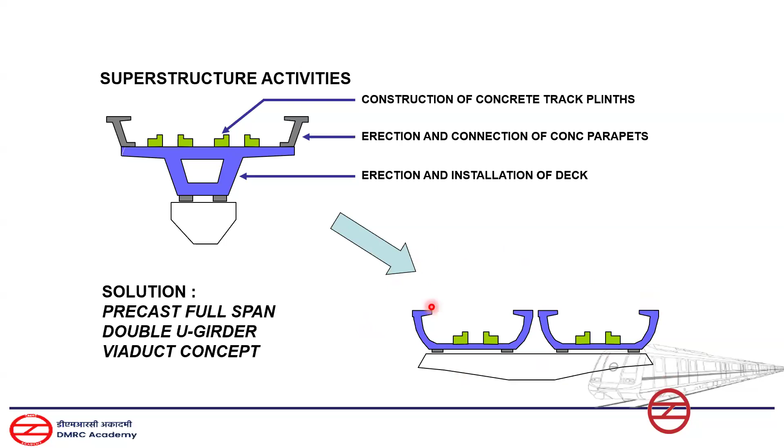Once the dead weight of the superstructure is lowered, we can go for lighter or shallower foundations also, and there we can also save concrete and resources. So this U girder adoption appeared to be very economical in terms of cost and quantity saving, apart from time saving. These are basically one more comparison.

When we go for this, there is no need of parapet, walkway, or noise barrier, everything is merged into these flanges of the U girder. There is no requirement of a parapet, no requirement of putting railing on that. Everything is now merged into the webs and flanges of this U girder.

One more significant saving was observed when we were using this U girder system, this box girder system. The rail was to be fixed at this level. When we adopted this twin U girder, the rail level drastically went down by roughly 1.5 meter. This was a good saving in terms of quantity of concrete, as I was talking about in the previous slide.

This quantity of concrete was saved, so dead weight of the entire concrete structure was also saved, and there was a reduction in foundation size, be it pile or pile cap or anything. So when quantity is saved, ultimately cost is directly saved.

That was another advantage of using this U girder, apart from time saving and everything. We have also customized the precast I girder into T girders, because the I girder has its own challenges. Once you erect the I girder between two spans, you have to use shuttering or staging from the bottom to lay the slab over it. To erect the staging, you need ground access, which in urban areas is again a challenge.

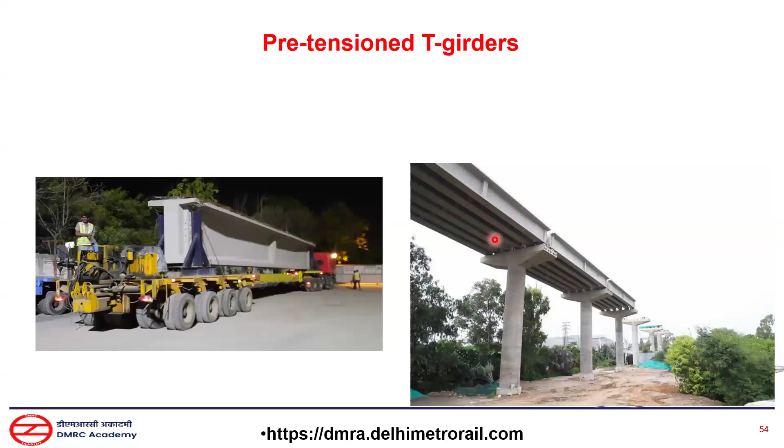One more precast integration we did when constructing Jaipur Metro. We were given the task of installing their metro system, so we constructed our metro system and also integrated the road flyover into the same column, same pier. This is the exact drawing we adopted there. The bottom first level is basically for road, and the second level is for the metro system. This also saved a huge amount.

Otherwise, if the metro system was laid first, or the flyover was laid first, there would be no space to run the metro over it, or vice versa. So because of this meticulous, advanced, integrated planning, this entire integrated system has evolved.

These are actual photographs. You can see on the ground level, road is moving, and in the middle level another flyover is moving, and on the top metro is moving. So in total there is huge saving in terms of resources and time, and it's a good saving in terms of environment too, because otherwise this road, flyover, or metro may be running separately, capturing more areas on the ground, disturbing more greenery and structures, and consuming more energy from the environment.

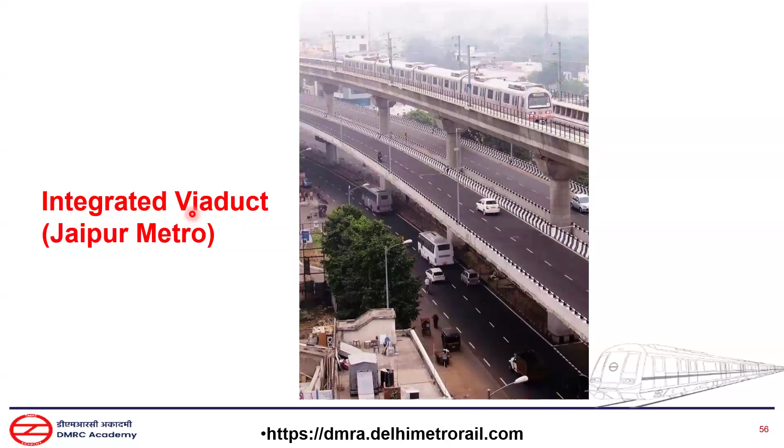This has become a good case study. Now many other metros and cities are adopting this. We are also constructing the same system in North Delhi area, from Majlis Park to Maujpur area, building this integrated system.

Coming to the next structure, the pier cap, just on top of the pier. Earlier we used to construct this pier cap using the in-situ method, where we erect staging and shuttering at the site, transport concrete, and construct it there. Constructing the pier cap was also challenging, apart from curing and other quality control aspects, so it was very time-taking and space-consuming. So we went for precast technology, where we started constructing the pier cap in our casting yard.

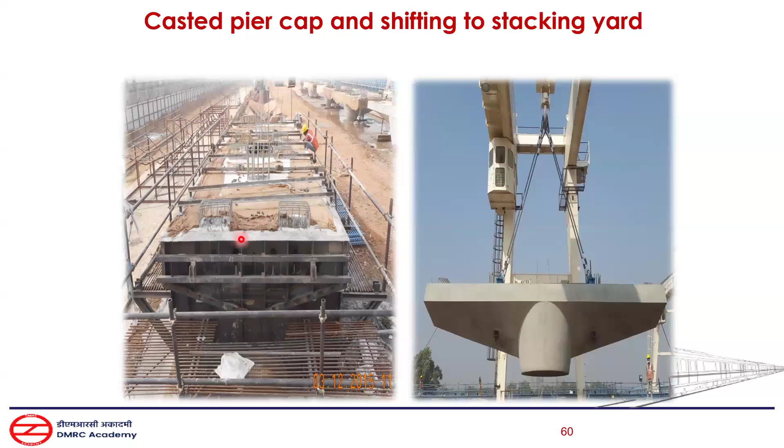So simply we keep dowels open, and there is a central opening in the pier cap through which concrete is poured, and both pier and pier cap are integrated or stitched.

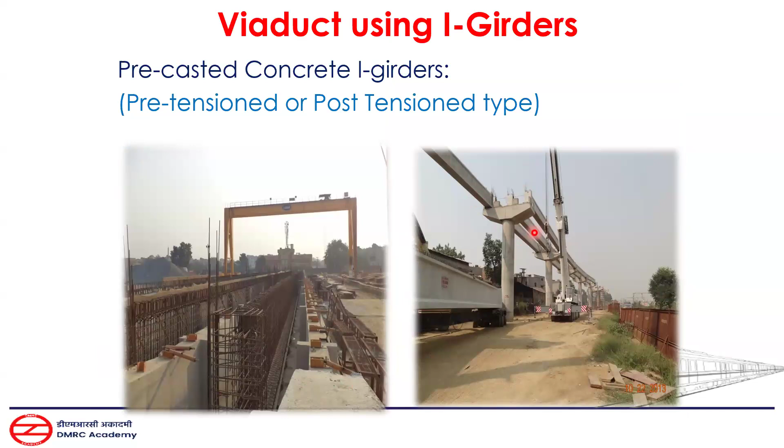We have also used precast I-girders in previous phases, that is now obsolete. This is the latest technology of the structure which we are using in our system, which is basically U girders.

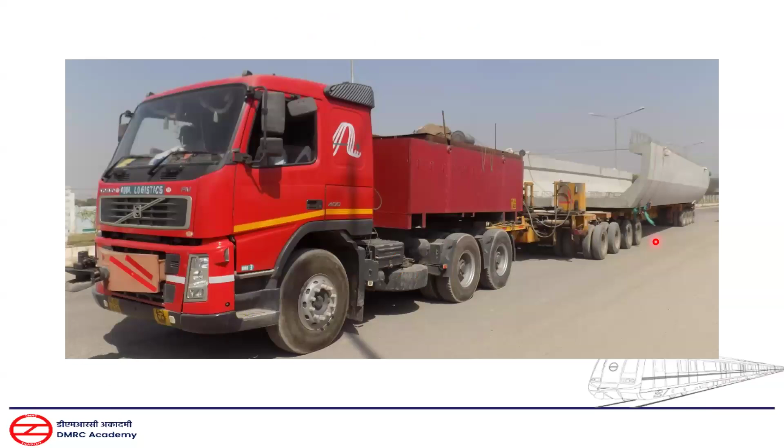Earlier we were using a 26-meter span length of U girder. Recently we have extended it to 28 meter. We can now construct a 28 meter length single span or full span U girder. That is pre-tensioned. You might have observed or read somewhere that the Bullet train is also using this.

Hello. Yes, sir, yes, you are Sanjay. Hello, you can mute. I think someone wants to say something. Akhil, yes please, if there is any query let me know, otherwise I am just moving ahead. I think the mic was unmuted by mistake. Okay, thank you.

So what we did, we saved a lot of time and quantity of resources like concrete and everything in construction of the U girder.

Erection of the U-girder was again a challenging task because at every location we had to mobilize two cranes, then transport the U-girder to its actual location, then it had to be lifted and placed over the pier caps.

What we did, we thought of using launcher methods, auto launching methods. So we explored and found that China has this kind of system. We brought two auto launching machines like this, you can see in the photographs. What this machine does is actually travel from pier cap to pier cap.

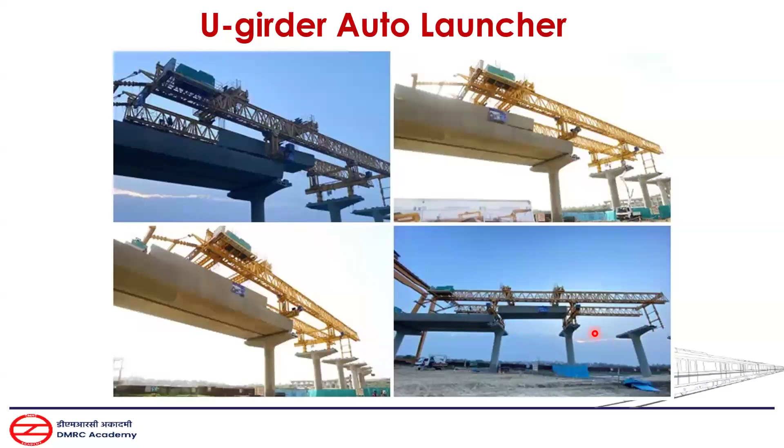There is one transporter, you can see in the photograph, which actually runs on rail. A track is laid for this transporter of the U-girder. It comes and collects the U-girder, picks it from the feeding point, and transports it to the location where the launcher is. It feeds the U-girder to the launcher, and then the launcher launches the U-girder onto the pier caps.

This machine, which we have used in two projects, appears to be very fast. So in construction of the U-girder we save time, and while erecting also we have saved by using this method and machinery. Altogether the U-girder appears to be very effective, cost-wise and time-wise. And since it was constructed in a casting yard, the build quality was much better than other methods.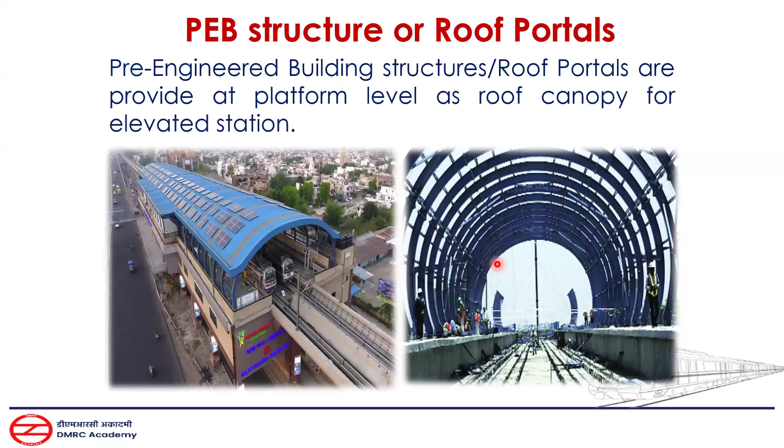As far as the station area in the elevated corridor is concerned, we are also using many precast structures in stations. Earlier, these precast structures were not there in the station area. We were constructing earlier this entire station like an RCC frame structure. You might have seen in this photo, there is a central column in the station, and on either side of the station there are two column lines running.

This particular location is in Rohini area of Delhi. You will find there were two roads, one here and another here. In the central portion we were constructing our viaduct, and at this location we were required to construct a station. So on the sides there were footpaths running.

You will not believe the entire footpath was damaged because the columns of this station had to be constructed, and beneath one column of the station there were 5 pile foundations, on each side. So the entire foundation was constructed on the footpath, while the central portion was on the median. So it was very time taking and space consuming. So DMRC did brainstorming and adopted precast structures in stations also.

Now, as you can see in the next photograph, central columns are still there, but it is slightly sturdier and bulkier compared to the previous one. But now the side columns are deleted, only central columns are there. Up to here, these columns are cast in situ, and from this joint till subsequent height, these heads are pre-casted.

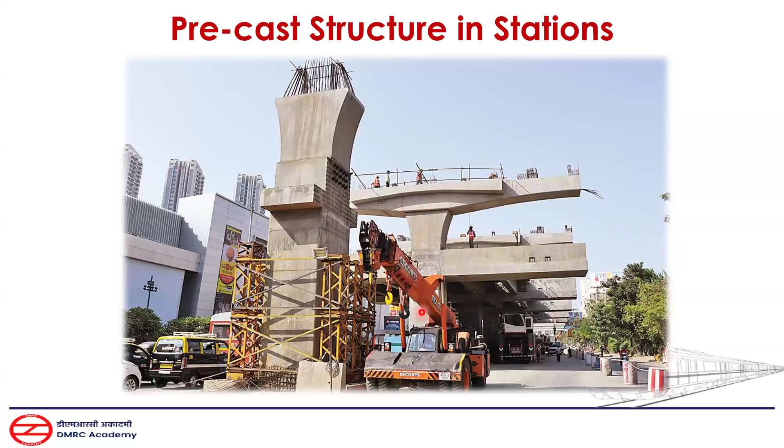And then from each pier column to the next pier, we have to fix the T girders and pi girders. You can see we have constructed precast pi girders, and in the image you can see the cross section of this girder is pi kind of shape.

So in a particular elevated station, there is a platform, and then there is a concourse where you buy the tickets. At the platform, we have placed this pi girder on each side, so you can simply have one platform slab where you can stand and board and deboard the metro system. Even in this pi girder, you can see there is an RCC gutter also precasted.

So entire thing is precasted now. Almost every structure of a station is precasted except the central column up to the height where pier arms are connected - these columns are still cast in situ, including the foundation. Normally pile foundations are being used. Rest of the components like pier arms, pi girders, and other girders are all precasted now. And the top roof portion is a prefabricated steel structure.

So the station is also using many precast elements - I would say more than 80% of structural elements are precasted now in the elevated corridor. It has saved a lot in terms of cost, quantity, and time, as well as causing less disturbance to existing flora, fauna and structures, and thus less emission of dust, noise, and carbon dioxide.

And then we have to carry out the curing, wet curing, and believe me, doing curing along a linear project is very challenging. So the quality of the structure, and ultimately the entire life cycle of the structure, is not that much in control. This was basically the in-situ method of track construction, which is still used by most metro systems. But now I must say in the country, the precast track method is also available.

One method which is already used and in operation is used in the RRTS project, connecting Delhi to Meerut. There, this precast slab track system has been used. Basically, a precast slab of 4 meter by 2.4 meter in size was casted in a casting yard and brought to the site. It is grouted with the shear keys already provided in the track slab, deck slab, and then the rail is fixed with clamps and grooves in the precast slab. So this method is also already used in India.

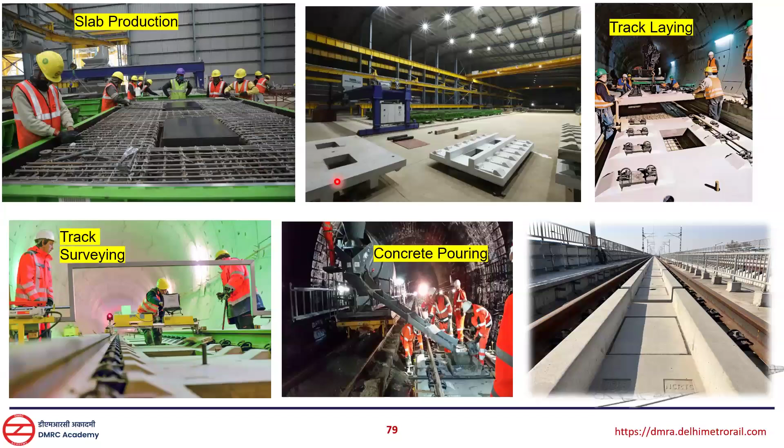Many more metros, including DMRC, are planning to implement this method in track structures. These are some photographs of construction of precast slab track in a factory casting yard. You can see reinforcement being fixed in the mold. The precast slab track with the entire fastening system fixed is being laid in one of the tunnels of the RRTS. Pouring of the grout concrete, flowable concrete, self-compacting concrete is done to grout or stitch the precast slab with the bottom invert slab of the tunnel or deck slab of the viaduct. Then final track survey is done.

Recently, the country is building a bullet train for high speed track, constructed at a speed of 350 kmph, and they will be operating around 320 kmph. Just to give perspective, the previous corridor I mentioned, the RRTS, is designed for 180 kmph and will operate at 160 kmph, while all other metro systems in the country are designed for 95 kmph and operated at 85 kmph only.

So you can see the difference in speed domain. Metros are not basically for speed, metros are for connectivity, better connectivity. That is why metro stations are very close, roughly around 1 to 1.5 kilometer. But in case of regional transit system or high speed, speed is the major criteria. We have to save time, so huge speed is there, and structures are adopted accordingly.

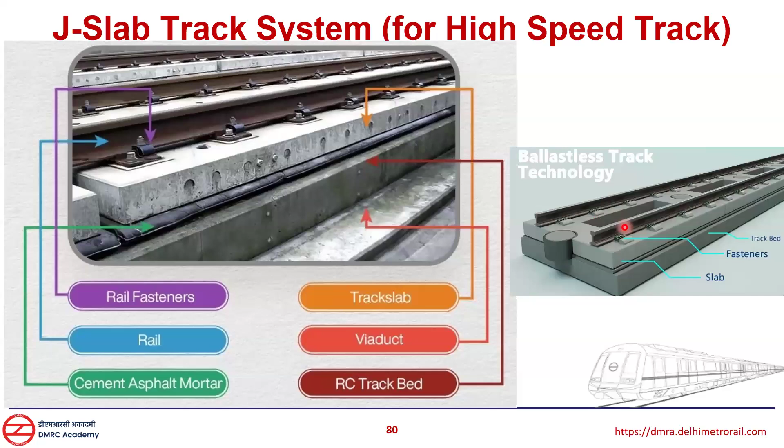Coming back to high speed track, the bullet train is also being constructed using precast technology. They call it the J-slab track system, basically the Japanese slab track system, because Shinkansen trains or Shinkansen technology is being used. Here the precast slab track, almost similar to the earlier one discussed, is used over the existing viaduct slab. The entire thing is precast and simply fixed with the viaduct slab using shear key and pouring grouting concrete.

In a nutshell, if we summarize the benefits of this precast technology in terms of sustainability, it appears beneficial in many ways. One is reduced on-site environmental disruption, which I have highlighted many times while discussing underground and elevated sections. This has reduced drastically because of adoption of precast technology. In case of using U-girder, overnight we can erect around 1 span as compared to other conventional girders like box girder, which takes several days.

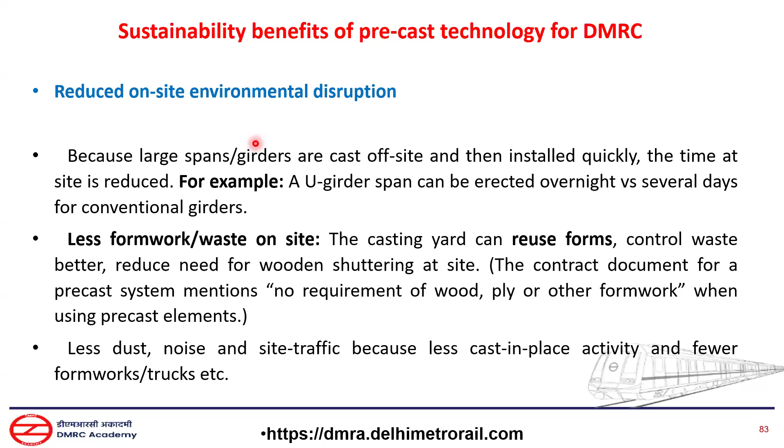And thus, when we have less in-situ activities, there is less noise, less site traffic hindrance, less space acquisition, and less dust production. That is how it basically ensures environmental integrity. And yes, because of this precast technology, the quality of the structure is excellent.

Once quality of the structure is ensured, we design and construct MRTS structures for around 100 to 120 years for non-coastal areas and around 80 years for coastal areas. So the life horizon of these structures is very long. It will take generations to be using these structures. To give you perspective, London Tubes as on date is crossing around 163 years of age. You can imagine the type of structure or methodology adopted at that time, and now they are also serving in the present time.

With certain retrofitting and rehabilitation of the tunnels, those structures are still serving. Once you adopt methodology like precast technology with better quality control, you can ensure the durability of the structures. You will have a longer life cycle and less maintenance. We have to think about the maintenance cost also while selecting the structure. Sometimes planners, designers or executing teams, due to lack of experience, think about reducing capital or installation cost and miss the aspect of maintenance cost in the overall life cycle. If you consider life cycle cost, maintenance cost plays a huge role, so precast technologies appear to be more and more cheaper. That is our takeaway from previous experience of previous works.

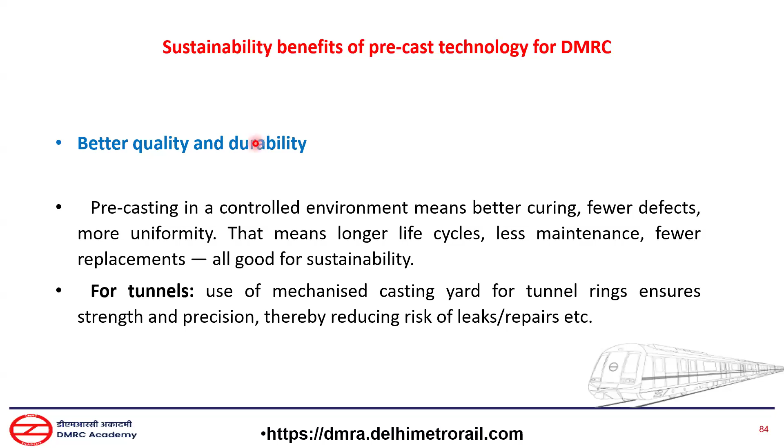Resource efficiency is another aspect - in construction we use huge amounts of cement, steel, aggregate, sand and everything. When we go for conventional RCC, it needs much more quantity of resources as compared to precast. With precast, the section of the concrete becomes more lighter and thinner, so there is a huge saving on the material quantity. Resources can be effectively utilized, and with optimum resources we can go for the construction.

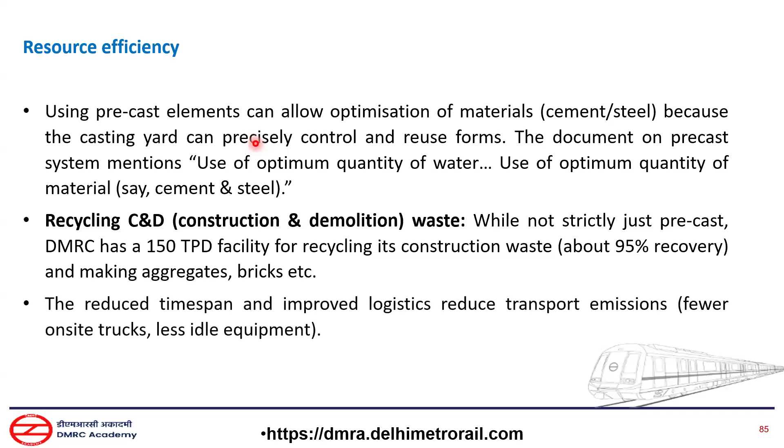There is one more aspect to this sustainability - recycling of construction and demolition waste. When we do construction activities, there is lots of demolished material, be it concrete or any other. Sometimes when we use concrete for production of precast or in-situ structures, there are surplus concretes also. This material is required to be effectively planned to be recycled for further usage, not in the same structure but maybe some other small scale structure like brick making or making aggregates. DMRC is already doing this - DMRC has set up its own recycling waste plant, a C&D based plant, consuming around 150 tons per day. This is a good area where we are actually ensuring sustainability.

With the use of precast structures, we can make our construction process faster. When construction processes are faster, emissions of gases by various machinery are reduced, and if we reduce the quantum of concrete materials, we indirectly reduce the quarrying load on the quarries from where we procure cement and aggregates. Indirectly, there is a lot of saving on emissions of gases, especially greenhouse gases. So in a nutshell, precast techniques can save much more over these areas also.

One more thing - once you install a metro system faster, if you adopt conventional methods of construction it may take much more time as compared to precast. This means your station or line opens at a later date, and the public is not going to shift from private vehicles to your public transport system. But once you use precast techniques, you can open your line beforehand, which means the public is motivated or encouraged to shift from their private vehicle to the public transport system.

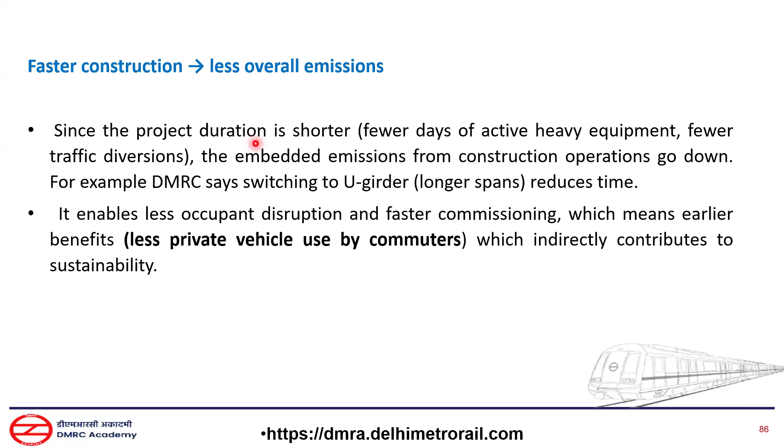Again, standardization and scalability is there with precast. We can scale up if the section and the span are standardized. We can scale it up to any quantity, any amount. If everything is fixed, for example, every U girder constructed will be of 28 meters.

So in the casting yard, we don't require formwork or shuttering for different lengths of the U girder. We can simply standardize, and for spans less than or more than 28 meters, we can have different kinds of precast structures, like I girders. For spans less than 28 meters, we have gone for I girders, and for more than 28 meters, we have gone for steel structures.

That is how things can be standardized, and scalability can be ensured, ultimately leading to sustainable practices. Once it is standardized, cost and wastage can also be avoided.

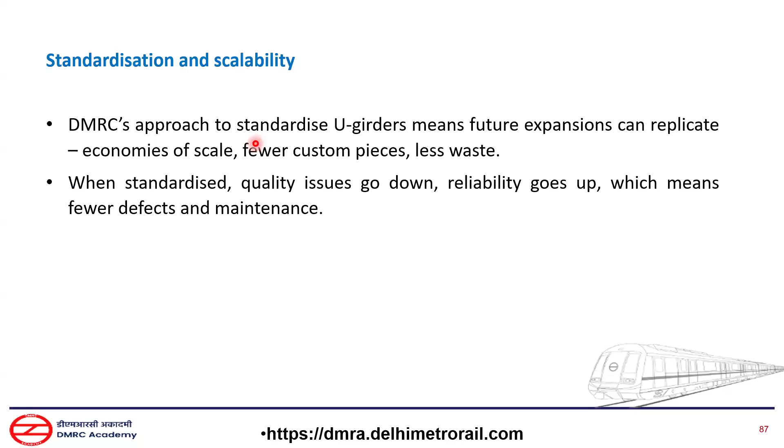In a nutshell, using these precast techniques, we can ensure production and resource efficiency through waste reduction, lower material and energy consumption, and using recycled materials for subsequent auxiliary construction structures like pavements.

We can enhance the lifespan of structures and their durability, and lower down maintenance by using these precast techniques. Ultimately, we can enforce a healthier environment by reducing greenhouse gases, enhancing air quality, and reducing dust quantity.

So that was all from my side. I hope I made some sense. Now I will open this forum for queries. If you have any queries, I would be happy to answer.